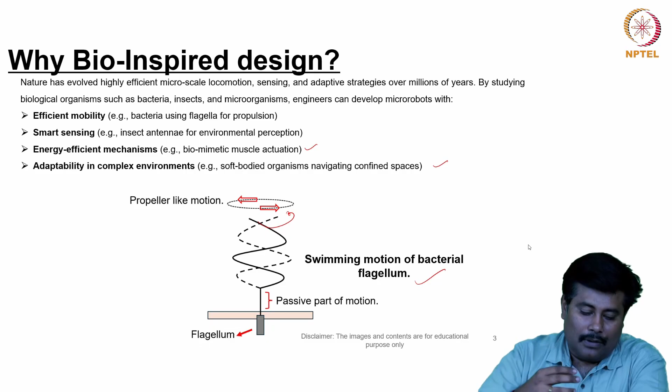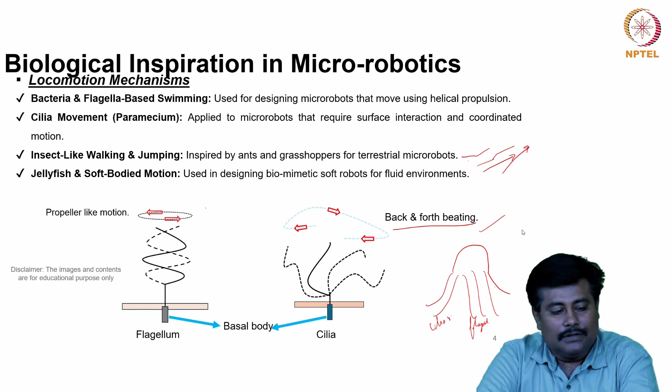Like we have been discussing the mechanism related to flagellum for micro robotic applications, how these are being employed. Then we also discussed some of the different key functionalities with reference to this locomotion mechanism, which includes flagella based, cilia movement based, insect-like walking and jumping, and jellyfish and soft body based motions.

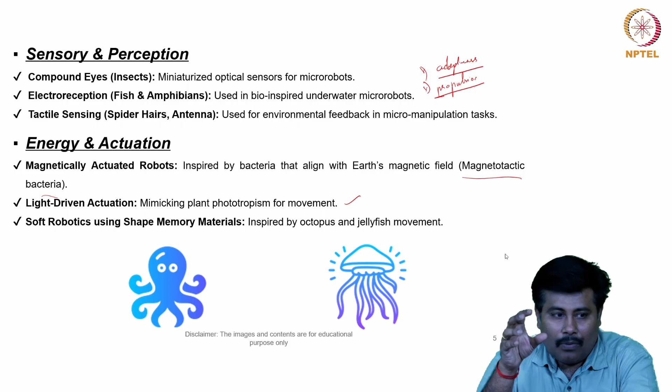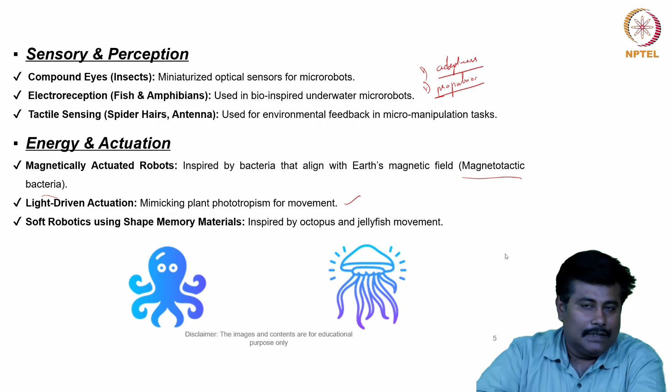Then when we talk about sensory and perception, it basically covers compound eyes, electroreception, and tactile sensing. We also had some discussion about energy and related actuation. Now we are focusing more on the gecko inspired climbing robot. In fact we have been discussing micro and nanoscale gecko inspired systems and their overall functionality.

Now let us discuss the different mechanisms involved in this gecko inspired climbing robot. If you look into the functionality of these robots, they can operate on vertically oriented surfaces, which allows the possibility of tasking. If we closely observe the adhesion mechanism being deployed, we have classified these adhesion mechanisms. A wide variety of researchers have studied this adhesion mechanism.

The most common adhesion mechanism is suction adhesion, where the robot carries an onboard pump to create a vacuum inside cups which are pressed against the wall or ceiling. This suction mechanism has a major drawback: it requires time to develop enough vacuum to generate sufficient adhesion force, and this delay may reduce the speed at which the robot can locomote.

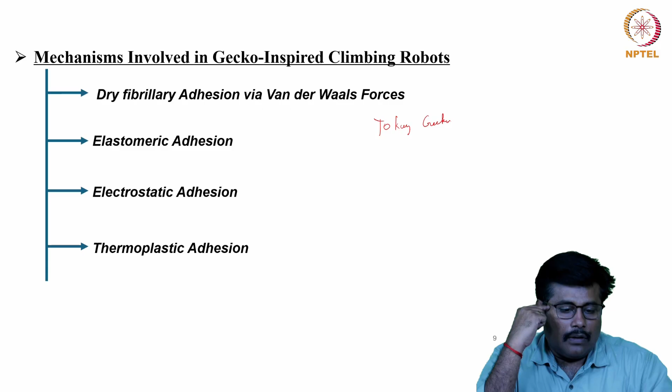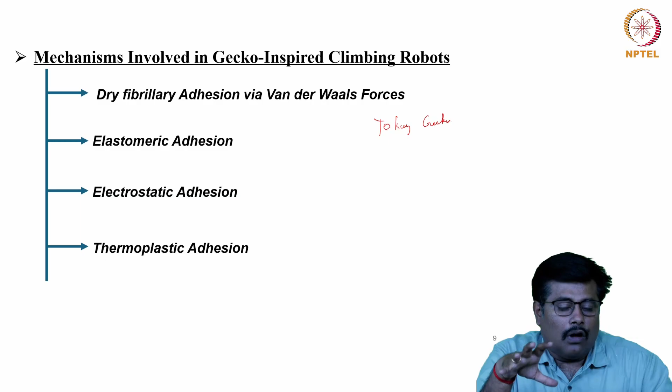In particular, geckos are most interesting because of their size. Let us consider the Tokay gecko. The Tokay gecko can weigh up to 300 grams and reach a length of up to 35 centimeters, yet it is still able to run inverted and cling to smooth walls. By studying and imitating its attachment mechanism, a new generation of robots can be developed, making locomotion possible on almost any kind of surface without contaminating the environment.

In fact, when we look into the different types of adhesion mechanism, one is called dry adhesion, which we had discussed, and the other type of mechanism is called elastomeric adhesion.

And then we have the electrostatic adhesion, and then there is a thermoplastic adhesion in place. So let us discuss one by one the mechanisms which are involved in this adhesion process. Now, as far as these dry adhesions are concerned, these dry adhesions work on the principle of the van der Waals force.

Now, when we try to closely observe how these geckos work with reference to dry adhesion, their feet are covered with millions of microscopic hair-like structures, which are called setae, which we had discussed earlier also. Each seta branches into hundreds of nanometer-sized spatulae. In fact, we have seen the structure where a kind of microfiber and nanofiber is integrated in this region, and it has an increase in the contact area.

These spatulae interact with the surface via van der Waals forces, which are weak but cumulative when applied across millions of spatulae, resulting in strong adhesion. So the adhesion is directional, meaning it can be turned on or off by adjusting the contact angle.

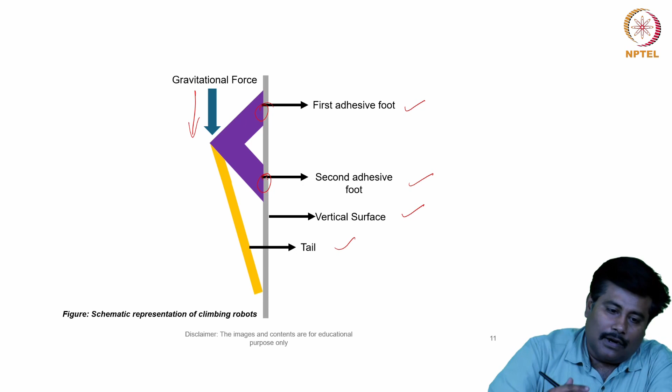So the suction mechanism we had discussed earlier will happen alternately between the first adhesive foot and the second adhesive foot. So there is going to be a contact and a separation. This contact and separation will be helpful for this robot to climb against the gravitational force, and it will also be helpful for this structure to pull the tail towards a particular direction. So this is a simple schematic representation of the structure.

Now let us discuss the models which are involved in this gecko-inspired climbing robot. When we try to closely observe the model, these models basically explain the design requirement. So you have a structure where there are certain distinct microstructures, which are in the form of an adhesive.

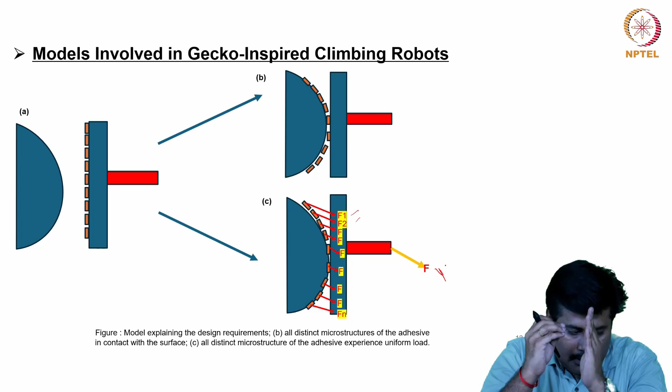So here if you see, based on the suction mechanism, if we try to notate it, there will be different forces which are exhibited. The resultant of these forces is the outcome which is represented over here. So it's a set of different suction cups which are being placed. These are micro suction cups. These micro suction cups will interact with the surface and induce suction, and from the suction we can observe the overall moment or the overall resultant force which is exhibited.

Now let us discuss this particular model which is involved in this gecko kind of arrangement. This is a proposed model where in this particular case there is a rigid tile arrangement, then there is a compliant support and a tile tendon which is available. So this is the structure.

Over this structure there is a pressurized sac, and then there is a pressure plate. This pressurized plate is made to move back and forth. When this plate is made to move back and forth, we have a pulley arrangement, and then we have a main tendon arrangement, and then there is a rigid tile, and then there is a compliant structure which is available.

So the movement of this pressurized sac is appropriately transferred to this compliant structure, and this movement of the compliant structure will create a kind of adhesion mechanism over here. So the overall mechanism is controlled by the pulley, as well as by the main tendon which is available over here, and so appropriate movements are monitored over here.

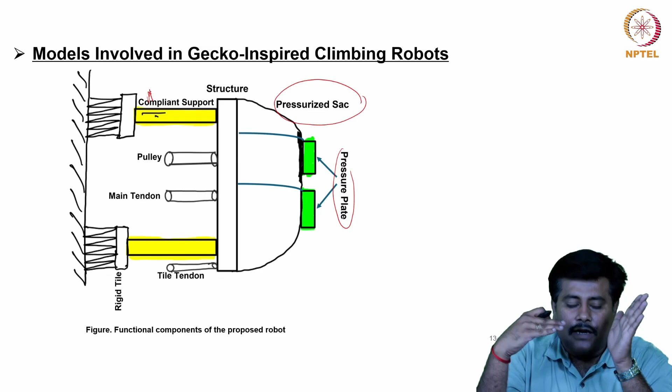So this compliant structure is slightly flexible so that it can create a kind of pull and push arrangement. These rigid tiles are a kind of support structure which will be involved for the movement in a climbing fashion. Now let us discuss the next level mechanism, which is called an elastomeric mechanism.

So as far as this elastomeric mechanism is concerned, it has a two-layer structure. So this is a kind of base, and this is a kind of elastomeric attachment which is available over here. So let us consider this as a soft flat elastomer with a radius A and thickness T. So there is a kind of Vytaflex elastomer which we are notating as E. It is mainly meant to create a kind of smooth surface S.

So when a compressive load sigma C is applied, the Vytaflex elastomer attaches to a rough surface with an amplitude H, a roughness, and the wavelength lambda. Then there is the detachment process of this Vytaflex elastomer from a smooth surface when a tensile force Fp is applied, and the detachment process of this Vytaflex elastomer from a rough surface when a tensile force Fp is applied.

So ideally what is happening is, we are trying to apply an attachment and a detachment process with these Vytaflex elastomers, so that there is going to be a kind of elastomeric adhesion exhibited over here. This elastomeric adhesion will be helpful for appropriate movement in the system. So if we closely observe, the different parameters which affect this particular system are the thickness, the wavelength, the amplitude, and it also depends upon the force which is applied on it, which is noted as Fp.

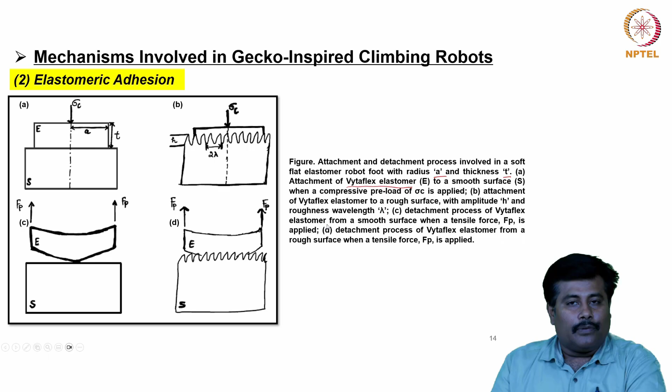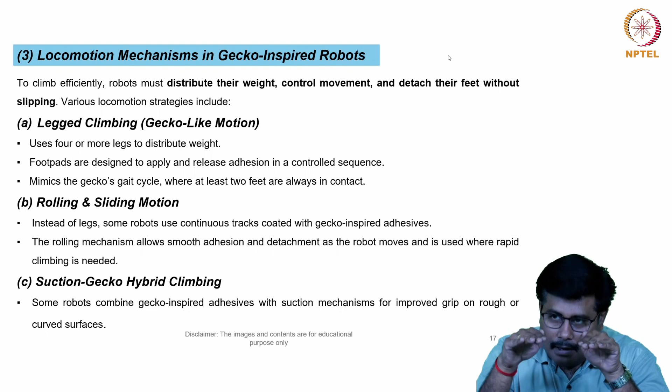It also has foot pads which are designed to apply and release the adhesion in a controlled sequence. It mimics the Gecko gait cycle where at least 2 feet are always in contact. So let us consider there are 4 feet; 2 feet will be in contact and 2 feet will be helpful for the propulsion. So appropriately there will be a release in the suction and then there will be a forward displacement which can be observed over here.

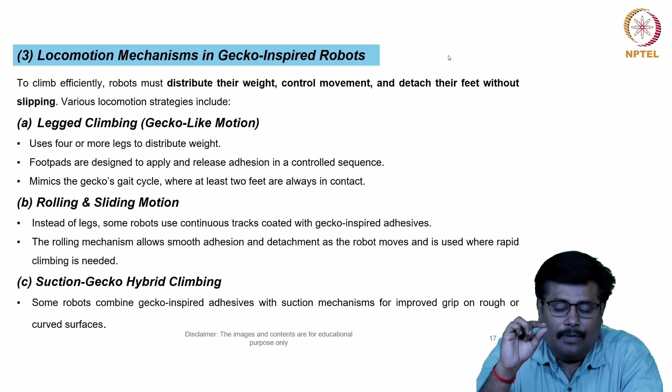Now let us talk about the rolling and the sliding motion. In the case of rolling and sliding motion, instead of legs, some robots use continuous tracks coated with the Gecko inspired adhesive. These rolling mechanisms allow a smooth adhesion and detachment as the robot moves, and it is used where rapid climbing is needed. So in this particular case, the rolling mechanism allows a smooth adhesion and then there is a detachment which appears over here.

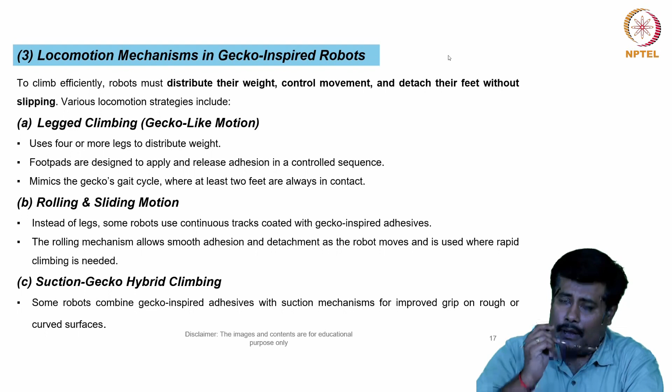When we talk about the suction type Gecko hybrid climbing, some robots combine these Gecko inspired adhesives with a suction mechanism for improved grip on rough or curved surfaces. So when we have a suction mechanism, there is a suction which is exhibited over here, and appropriately there is an improved grip which we can observe in this suction gripping mechanism.

Now let us see some of the commonly used Gecko inspired materials for such adhesive fabrication. The first adhesive which is effectively used is a PDMS structure. These PDMS structures have the advantage of high elasticity, easy curing, and they are cheaper also. However, from a disadvantage point of view, it has a low productivity and a bending problem. From an application point of view, it is mainly meant for wall climbing robots, etc.

Then with reference to PMMA, it has a high mechanical strength with easy applications. The major disadvantage observed is that it's brittle, and it is widely used for climbing robots and also for grippers. As far as PS is concerned, it has a high aspect ratio, low surface energy and a limitation of accurate replication, and it is mainly meant for some medical adhesives also. As far as PVS is concerned, it provides similar mechanical properties to that of Gecko, with low environmental sensitivity; it is complex to prepare, and it is widely used for different robotic applications.

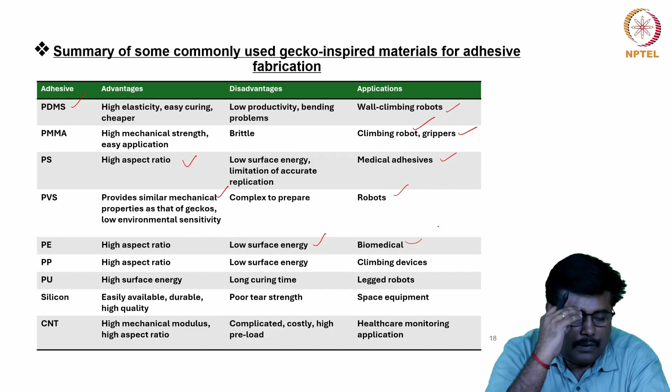As far as PE is concerned, it has a high aspect ratio, a low surface energy, and quite a good amount of biomedical application. As far as PP is concerned, it also has a high aspect ratio and a low surface energy. It is widely used for climbing device related applications. PU, which is polyurethane, has a high surface energy and a long curing time, and is used in legged robots. Silicon is easily available, durable and high quality. It has a poor tear strength and is used in space equipment.

And CNT has a high mechanical modulus and high aspect ratio, but is complicated and costly, and it is a highly preloaded structure. From an application point of view, it is mainly meant for different healthcare monitoring related applications, which are some of the key applications of this system.

So in fact, if we closely observe, these are some wide varieties of adhesive based materials which are used for fabrication. The selection of these materials ideally depends upon the type of mechanism which is deployed and the appropriate applications. Now let us see some of the applications of this Gecko inspired climbing robot.

As far as these Gecko inspired climbing robots are concerned, they are used for inspection and maintenance. Climbing robots for inspecting buildings, bridges, wind turbines and spacecraft are some of the key applications. Sometimes they are used for search and rescue operations, that is, robots that climb collapsed structures to locate survivors. So basically it can be used for surveillance and for identifying a particular person. It can be integrated with a camera for a face recognition system deployed in this particular structure.

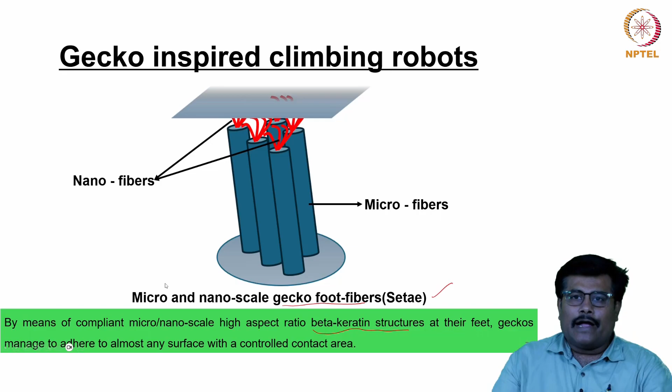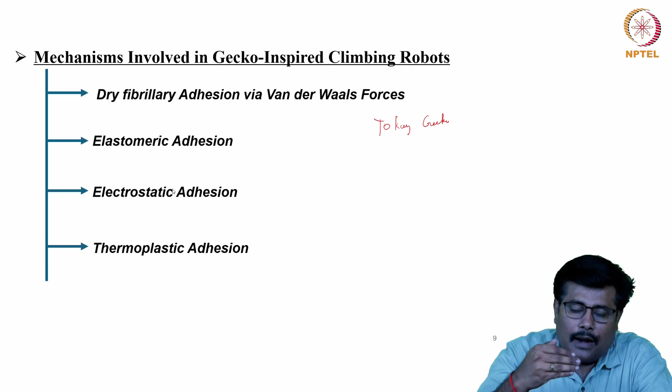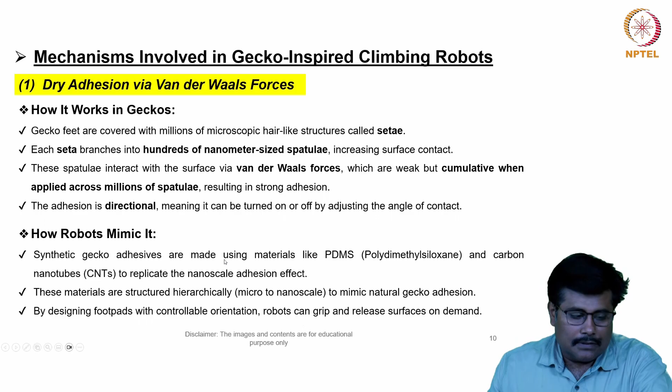Now to summarize, we discussed the overall functionality of these Gecko inspired climbing robots, which acts as a base for establishing such robots. We discussed the different subsystems under these Gecko systems and the different mechanisms involved. We classified these mechanisms into 4 different categories: a dry fibrillary adhesion based system, elastomeric adhesion, electrostatic adhesion and thermoplastic adhesion. As far as dry adhesion is concerned, we discussed how it works and how it's biomimetic. This is the overall schematic structure of such movement.

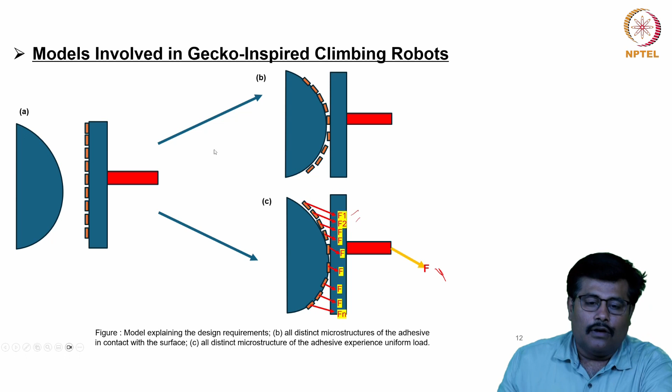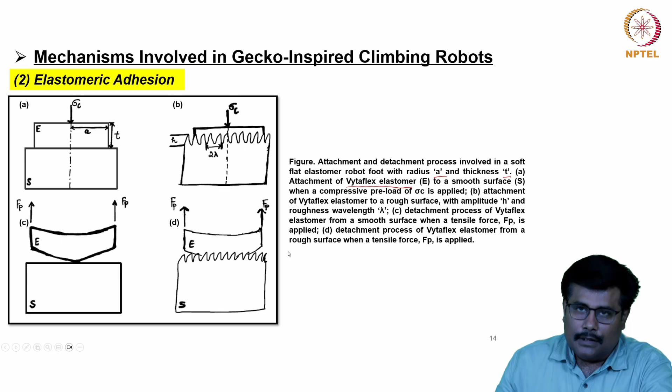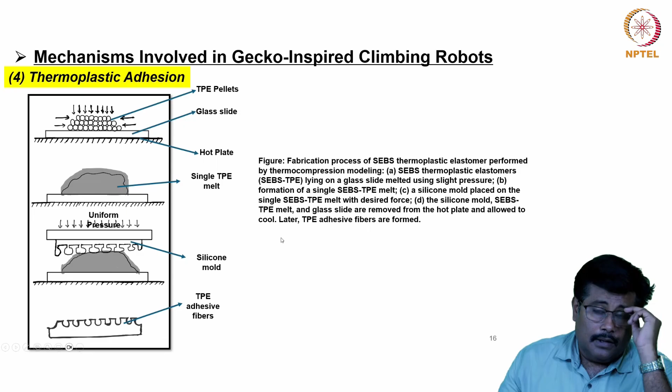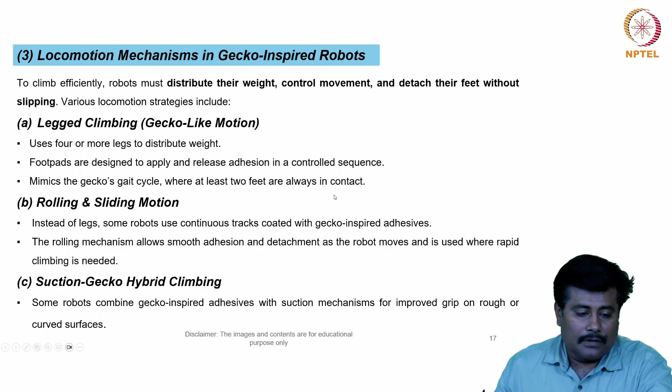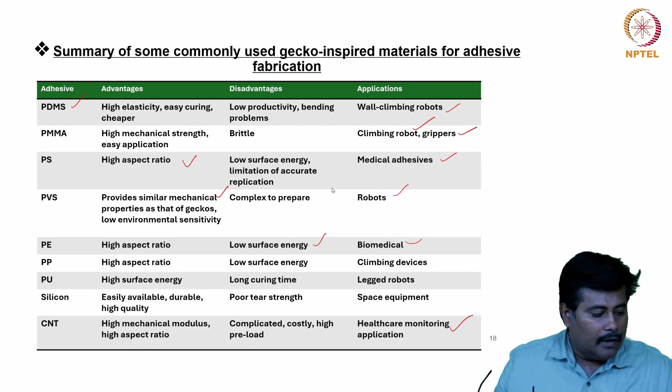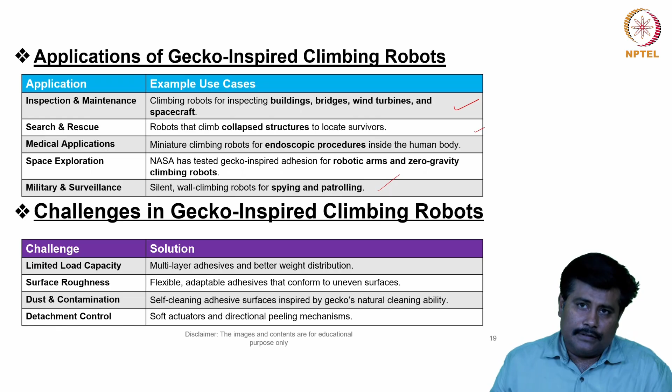We also discussed some of the commonly used gecko inspired materials for adhesive systems, and the different fabrication techniques employed for gecko related applications, and these are the applications and challenges related to the gecko inspired climbing robot. We will also discuss some other case studies with reference to such systems. We will be discussing magnetic swimming based micro robots and their applications in the upcoming lectures.